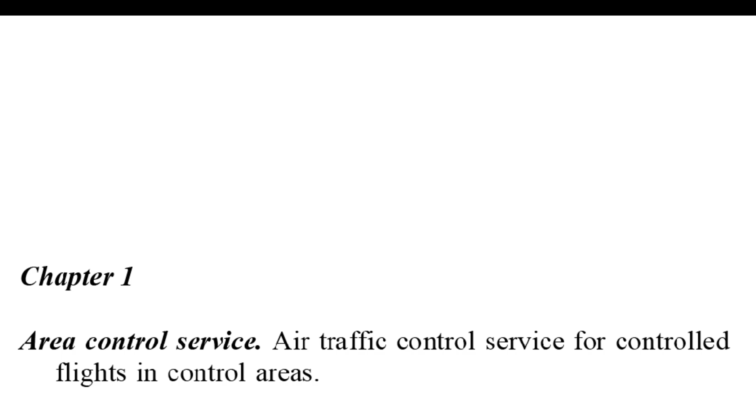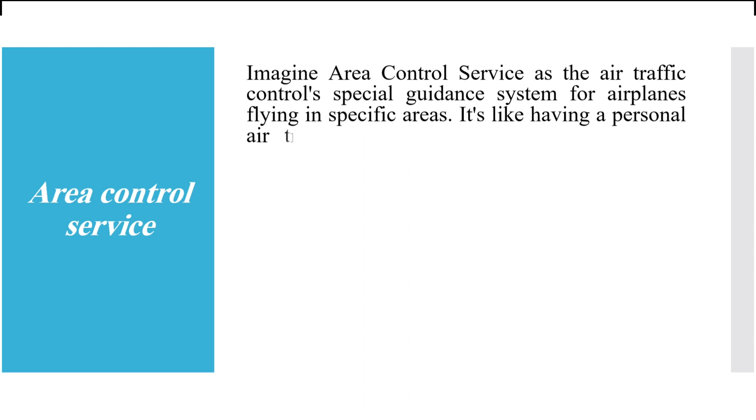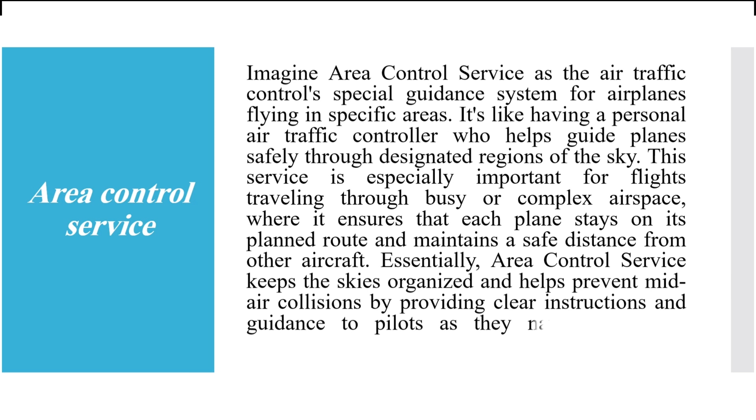Area Control Service. The definition mentioned in ICAO says it's air traffic control service for controlled flights in control areas. In simple words, imagine Area Control Service as the air traffic control special guidance system for airplanes flying in specific areas. It's like having a personal air traffic controller who helps guide planes safely through designated regions of the sky. This service is especially important for flights traveling through busy or complex airspace, as it ensures each plane stays on its planned route and maintains a safe distance from other aircraft. Essentially, Area Control Service keeps the skies organized and helps prevent mid-air collisions by providing clear instructions and guidance for pilots as they navigate through controlled airspace.

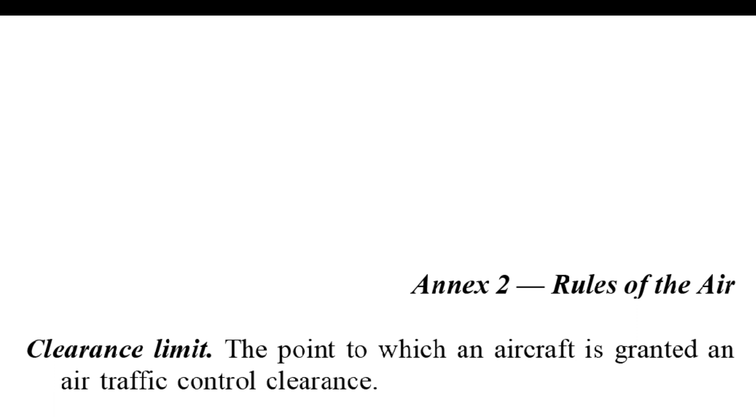What is the clearance limit? The point to which an aircraft is granted an air traffic control clearance. But let's learn more about this term.

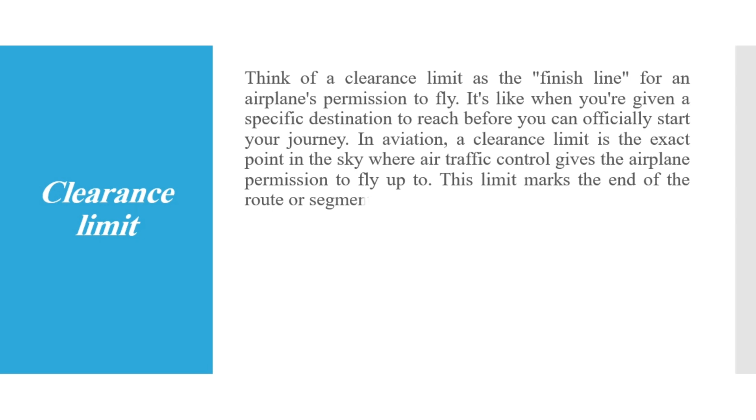Think of a clearance limit as the finish line for an airplane's permission to fly. It's like being given a specific destination to reach before you can officially start your journey. In aviation, a clearance limit is the exact point in the sky where air traffic control gives the airplane permission to fly up to. The limit marks the end of the route or segment that the aircraft is cleared to travel along. Once the plane reaches this designated point, it has fulfilled the requirements of its clearance and can proceed further only after receiving additional instructions or clearance from air traffic control. In simpler terms, it's like reaching a checkpoint in a game before moving on to the next level, ensuring that each step of the flight is carefully monitored and controlled for safety.

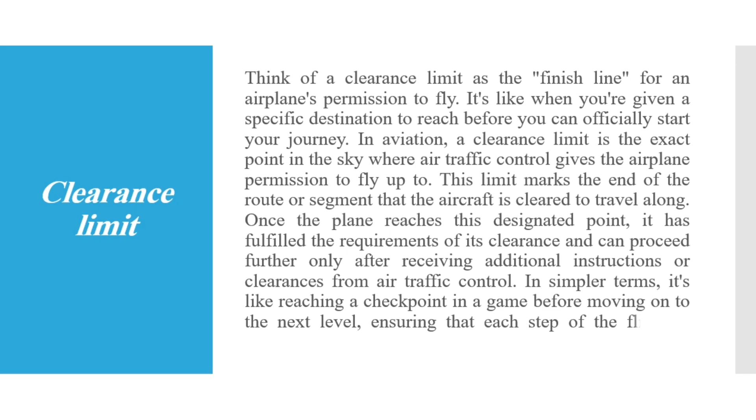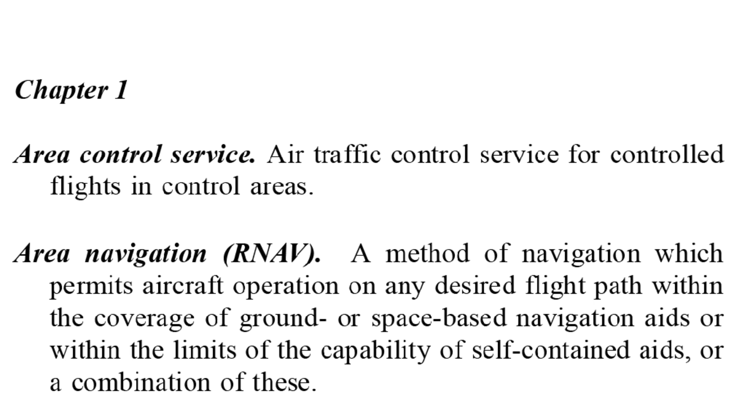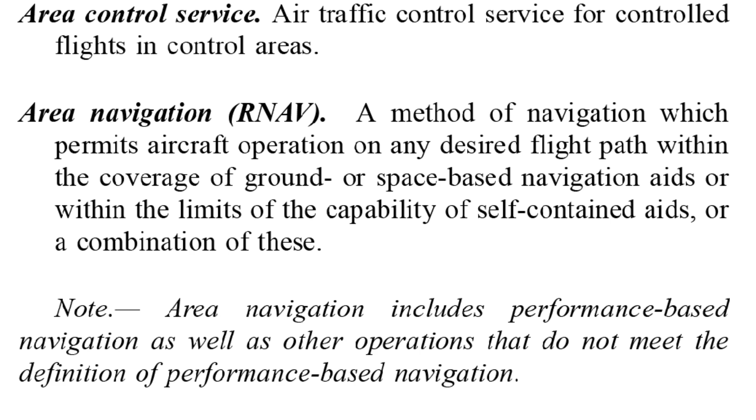Area navigation, or RNAV, is a method of navigation which permits aircraft operation on any desired flight path within the coverage of ground or space-based navigation aids, or within the limits of the capability of self-contained aids, or a combination of these. There is also a note that area navigation includes performance-based navigation as well as other operations that do not meet the definition of performance-based navigation.

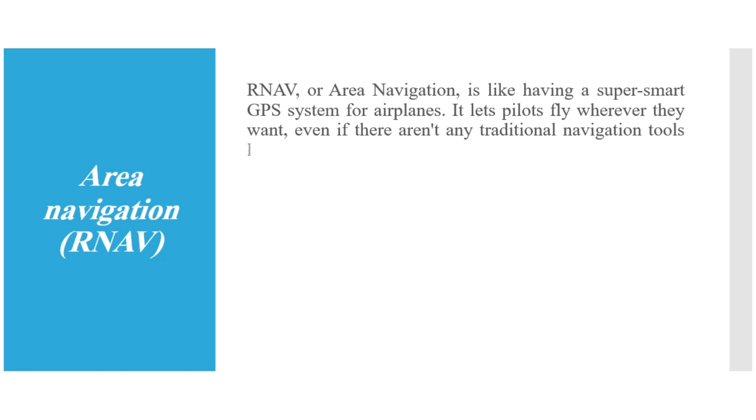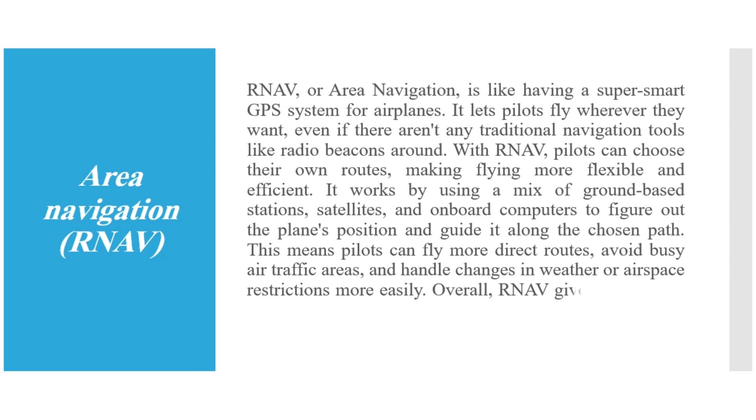Let's encapsulate it. RNAV, or area navigation, is like having a super smart GPS system for aeroplanes. It lets pilots fly wherever they want, even if there aren't any traditional navigation tools like radio beacons around. With RNAV, pilots can choose their own routes, making flying more flexible and efficient. It works by using a mix of ground-based stations, satellites, and onboard computers to figure out the plane's position and guide it along the chosen path. This means pilots can fly more direct routes, avoid busy air traffic areas, and handle changes in weather or airspace restrictions more easily. Overall, RNAV gives pilots more freedom and control in the sky, making their job safer and flights smoother for everyone on board.

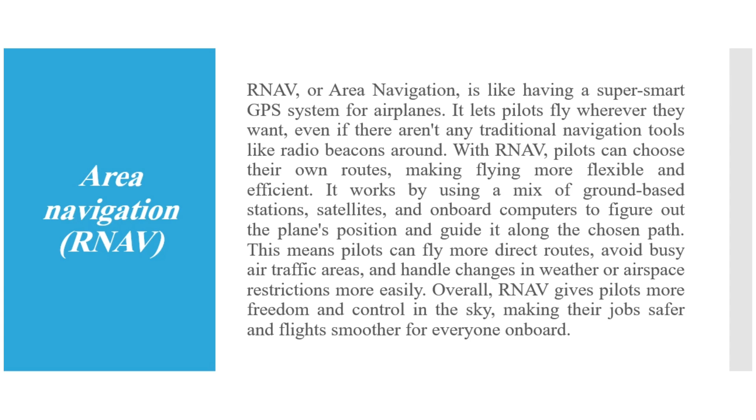The next part is ATS route, a specified route designed for channeling the flow of traffic as necessary for the provision of air traffic services. The first note says that the term ATS route is used to mean variously airway, advisory route, controlled or uncontrolled route, arrival or departure route, and so on.

Also noted, an ATS route is defined by route specifications, which include an ATS route designator, track to or from significant points or waypoints, distance between significant points, reporting requirements, and, as determined by the appropriate ATS authority, the lowest safe altitude.

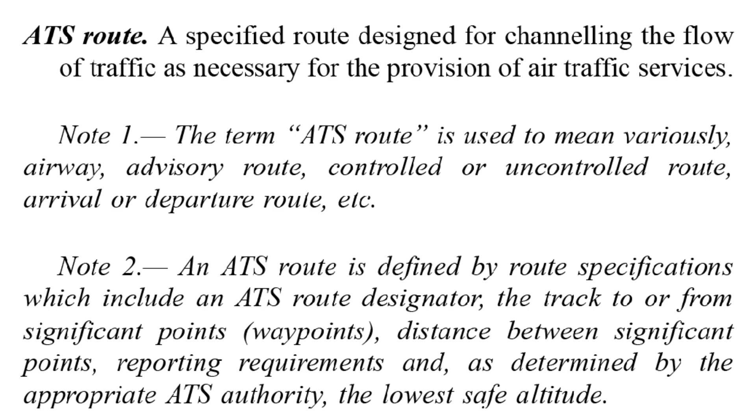What is Automatic Dependent Surveillance Broadcast, ADS-B? A means by which aircraft, aerodrome vehicles and other objects can automatically transmit and receive data such as identification, position, and additional data as appropriate, in a broadcast mode via data link.

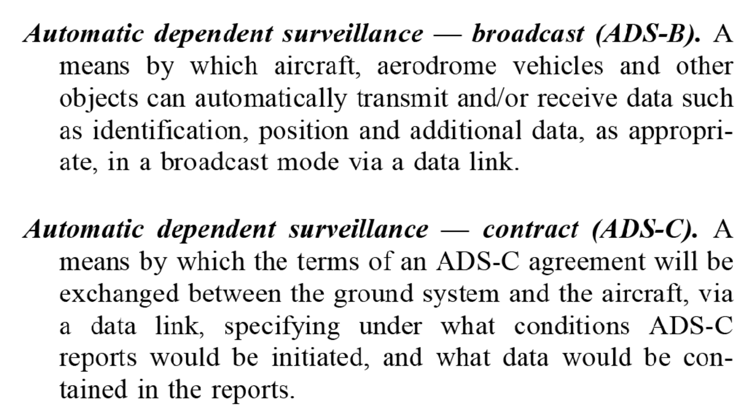Also, we have Automatic Dependent Surveillance Contract, ADS-C, a means by which the terms of an ADS-C agreement will be exchanged between the ground system and the aircraft via data link, specifying under what conditions ADS-C reports would be initiated and what data would be contained in the reports. There is also a note that the abbreviated term ADS contract is commonly used to refer to ADS event contract, ADS demand contract, ADS periodic contract, or emergency mode.

Imagine your airplane has its own way of talking and listening to other airplanes and control towers, kind of like how your phone sends and receives messages. Automatic Dependent Surveillance Broadcast, ADS-B, is like your plane sending out messages automatically to let others know where it is and who it is.

It's like saying, "Hey everyone, I'm here, and this is me." Meanwhile, Automatic Dependent Surveillance Contract is like making a special agreement between your plane and the control tower. It's like saying, "Hey tower, let's chat about when I should send updates and what info I will share." This system helps keep everyone in the sky and on the ground aware of where planes are and what they're up to, keeping flights safe and coordinated.

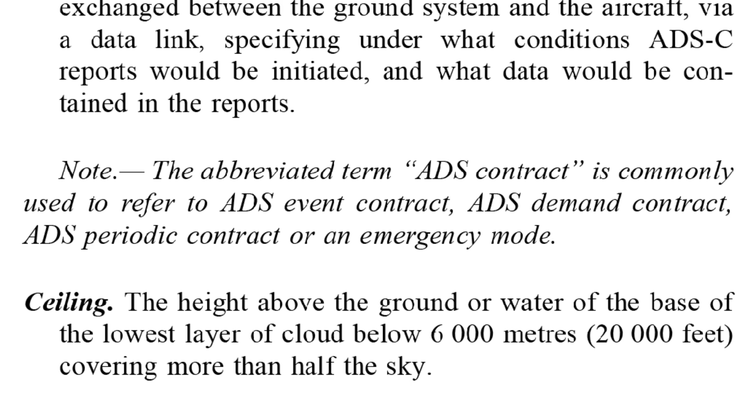What is the ceiling? The height above the ground or water of the base of the lowest layer of cloud below 6,000 meters or 20,000 feet, covering more than half of the sky.

And also we have changeover point. It's a point at which an aircraft navigating on an ATS route segment defined by reference to very high frequency omnidirectional radio ranges is expected to transfer its primary navigational reference from the facility behind the aircraft to the next facility ahead of the aircraft.

Changeover points are established to provide optimum balance in respect of signal strength and quality between facility at all levels to be used and to ensure a common source of azimuth guidance for all aircraft operating along the same portion of a route segment.

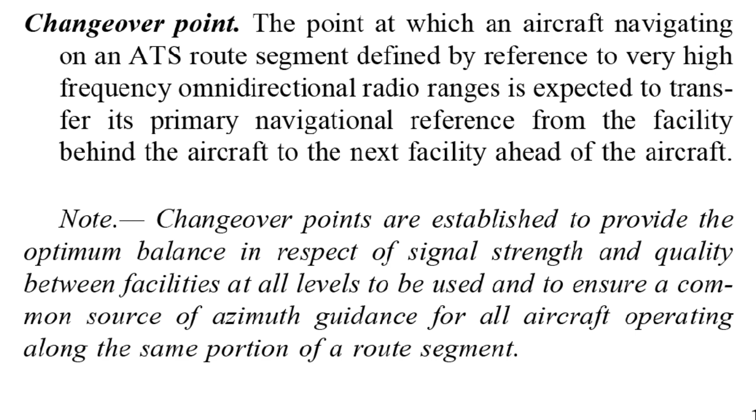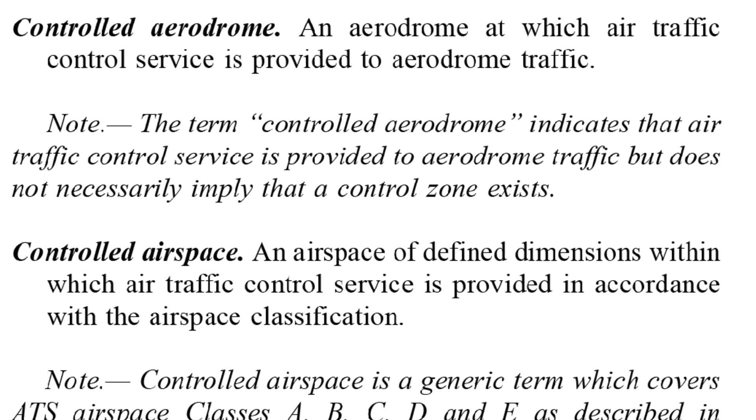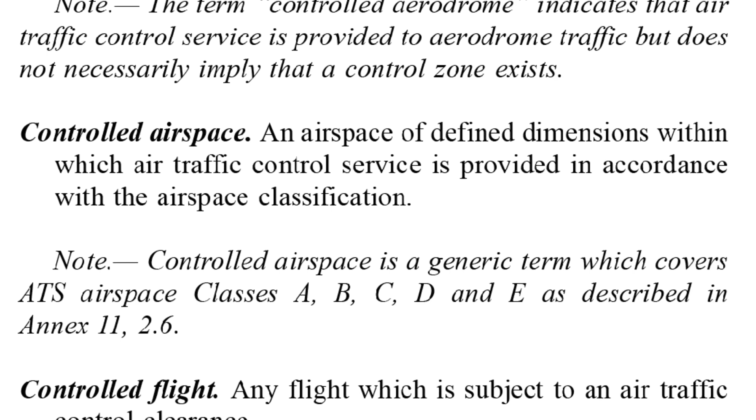We already talked about control area, a controlled airspace extending upward from a specified limit above the earth. Controlled aerodrome, an aerodrome at which air traffic control service is provided to aerodrome traffic. We should know that the term controlled aerodrome indicates that air traffic control service is provided to aerodrome traffic, but doesn't necessarily imply that a control zone exists.

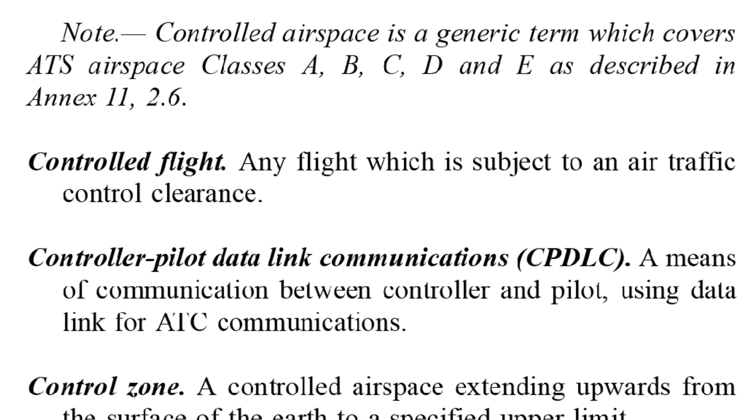Controlled airspace, as we talked already, is an airspace of defined dimensions within which air traffic control service is provided in accordance with the airspace classification. Controlled airspace is a generic term which covers ATS airspace classes Alpha, Bravo, Charlie, Delta, and Echo as described already.

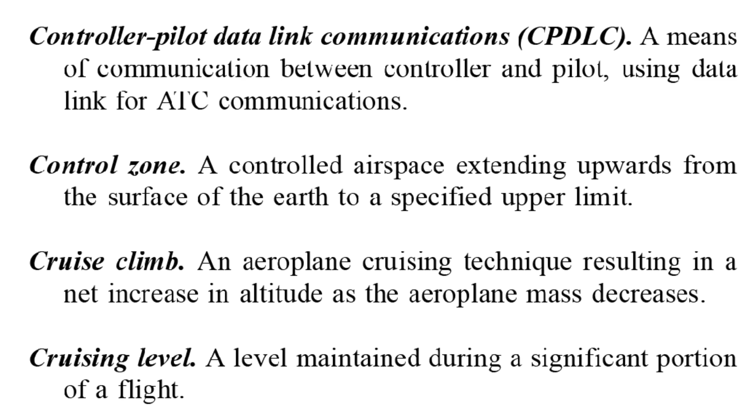Controlled flight, any flight which is subject to an air traffic control clearance. Controller-pilot data link communication, or in short CPDLC. It's a means of communication between controller and pilot using data link for ATC communications.

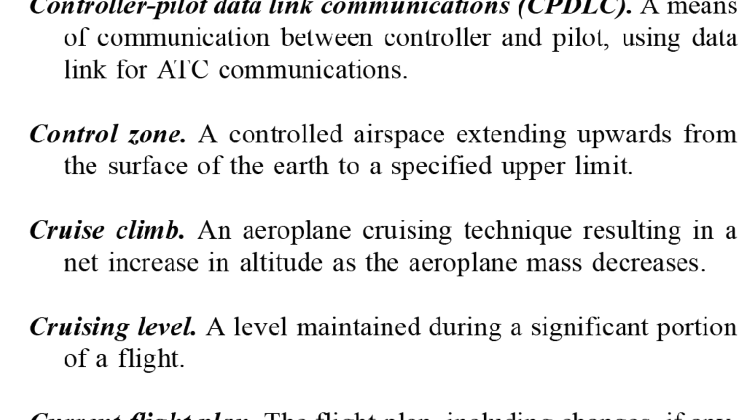So imagine you're on a flight and instead of talking to the air traffic controller using a radio, you're sending text messages, like how you chat with friends on your phone. Controller-pilot data link communication is like texting between the pilot and air traffic controller, but it's all done through a special system called data link.

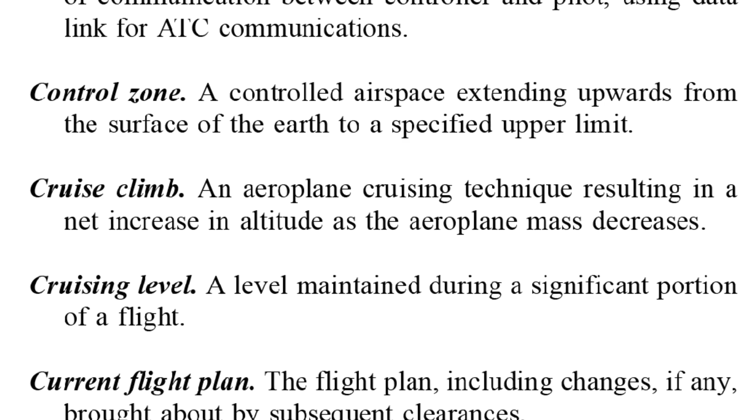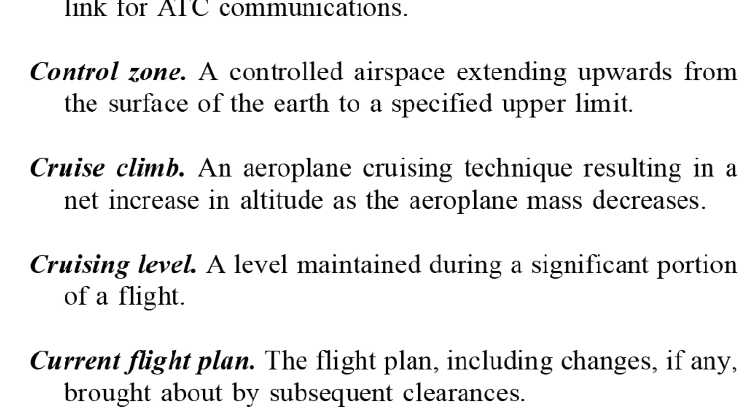Instead of speaking over the radio, pilots and controllers can send messages back and forth to communicate important information, like changes in flight plans or instructions for landing. It's like having a silent conversation in the sky, making communication smoother and more efficient for everyone involved.

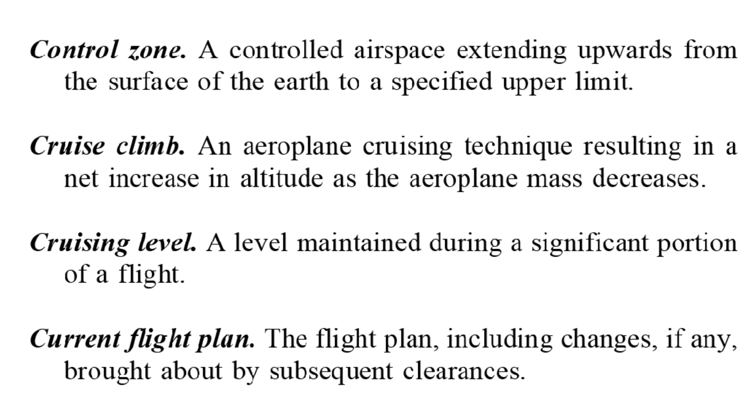Control zone is the next item. A controlled airspace extending upward from the surface of the Earth to a specified upper limit. Cruise climb, an aeroplane cruising technique resulting in a net increase in altitude as the aeroplane mass decreases.

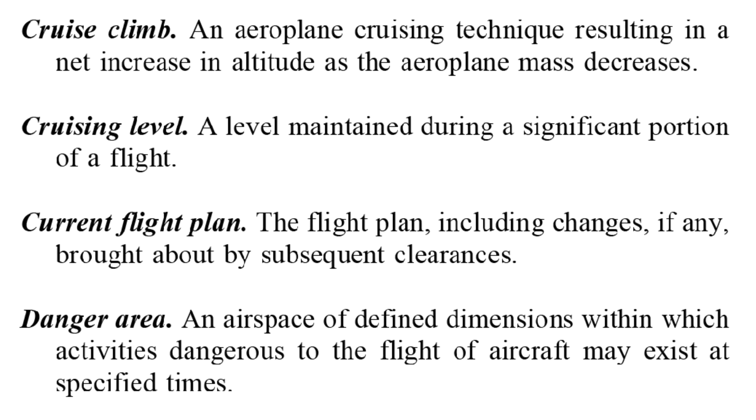I need to describe it more. Let's see what is a cruise climb in simple words. Just imagine you're on a really long road trip, and as you drive, your car gets lighter because you're using up fuel. Cruise climb is kind of like that, but for aeroplanes.

So picture this: as the aeroplane flies along, it's burning up fuel, which makes it lighter. But instead of just staying at the same altitude, the pilot adjusts things so the plane gradually climbs higher as it gets lighter. It's like going up a hill while driving, except in the sky. This technique helps the aeroplane save fuel and fly more efficiently, kind of like finding the sweet spot where it uses just the right amount of energy to keep going.

What is the cruising level? A level maintained during a significant portion of flight. And also, we should know that current flight plan is a flight plan including changes, if any, brought about by subsequent clearances. Danger area is an airspace of defined dimensions within which activities dangerous to the flight of aircraft may exist at a specified time.